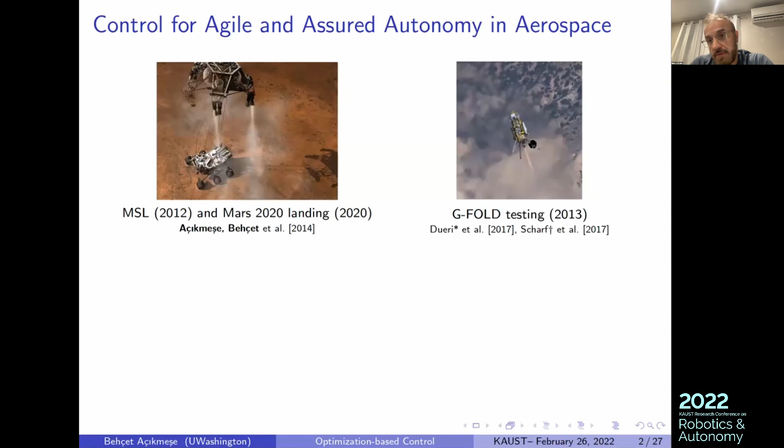And these technologies have been used, not that recent anymore, approximately 5 years ago, by SpaceX, and they are still in use for their reusable rockets, Falcon 9s. And we have been planning other applications of these methodologies for future missions, for space and also aerospace in general.

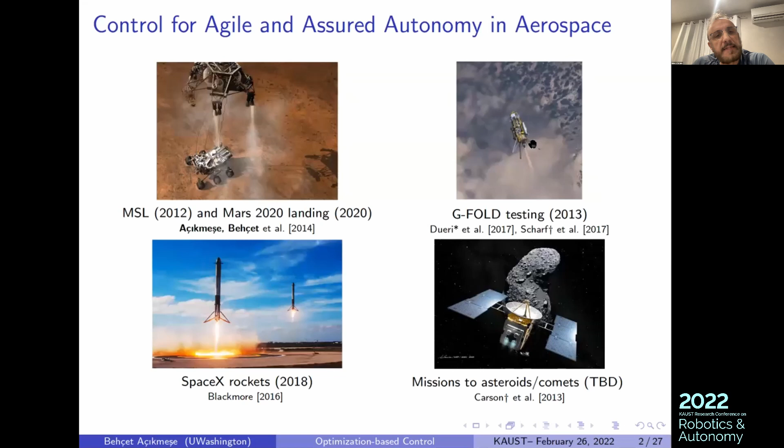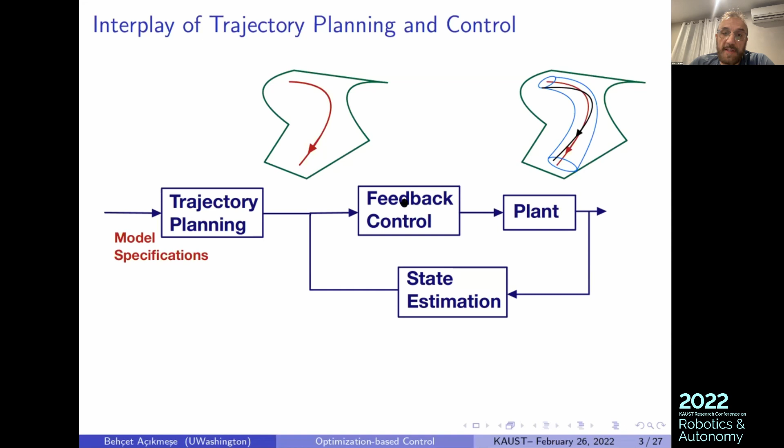Here, first, I want to get my lingo straight, I guess. When I talk about trajectory planning, I mean generating nominal trajectories to be followed by a feedback controller to guide a plant or system, a spacecraft or aircraft in this case. And I'll focus on trajectory planning results in this presentation. We also work quite a bit on feedback control and state estimation, but I'll not talk about it much here.

Our main approach is formulating the problems at hand as convex optimization problems. That's at the core of what we do. And here I want to describe what convexity is and what convex optimization is. In general, optimization is a branch of mathematics where you have a cost function, which is typically non-convex, meaning it may have multiple minima, that you are optimizing over a set of feasible solutions. And the set may be non-convex too, meaning that there may be lines between 2 points in the set that go out of the set.

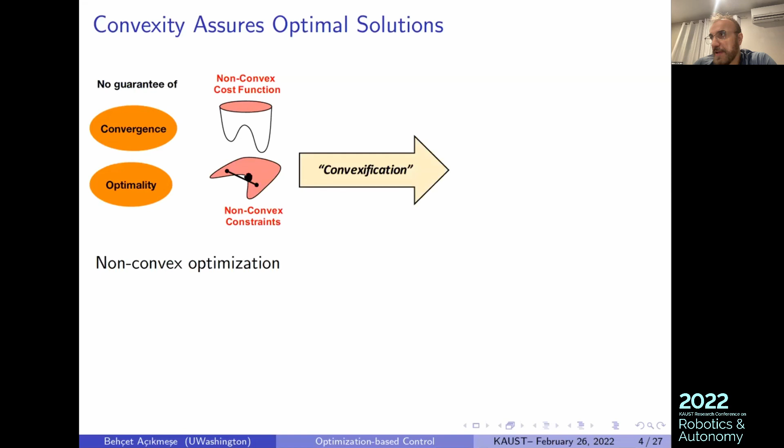Typically, when you have these non-convex optimization problems, it's hard to guarantee solutions in an automated fashion, especially if you want to solve them in real time. The approach we have been adopting is convexification, meaning a conversion of these problems into either equivalent or approximate convex optimization problems. In convex optimization, you have convex costs, which are much nicer. They typically have a unique minimum. And you optimize the problem over a convex set. If you can do that, there are highly reliable algorithms which are fast and also guarantee optimality. So they are potentially implementable in real time on board vehicles during operations.

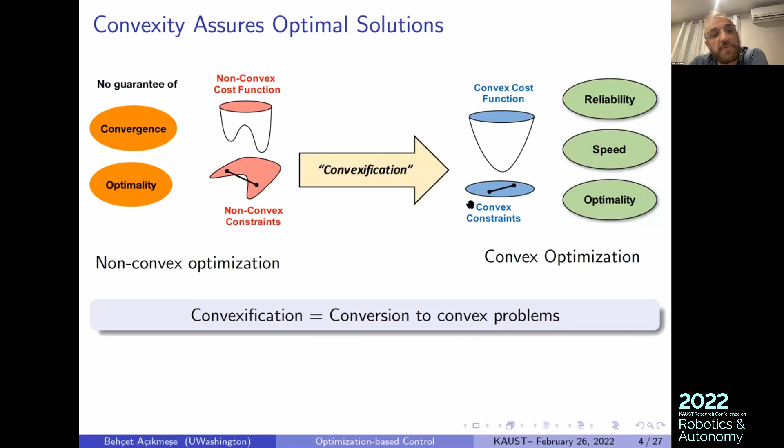The main theoretical contribution has been convexification, meaning the conversion of non-convex problems into convex problems in the realm of trajectory optimization or trajectory planning for autonomous vehicles. What's the trajectory planning problem? It has several components. The first one is the dynamics of the vehicle you have to pay attention to. There are state and control constraints. Some are physical constraints that you cannot violate. Some are mission constraints that are desirable to satisfy. And then there are costs and rewards. These are things you optimize for, and they depend on the mission at hand.

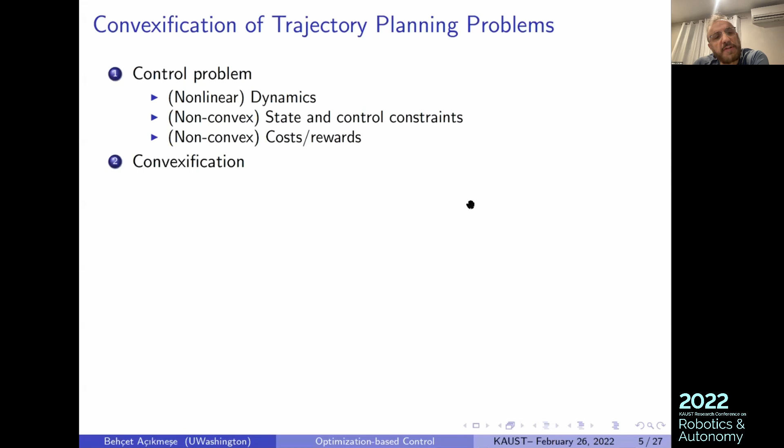For convexification, there are two typical methodologies we use. One is what we call lossless convexification. This is typically achievable when you have non-convexities in your control constraints. And if you have other sources of non-convexity, we use sequential convex programming methods. With lossless convexification, you can convert a non-convex optimal trajectory planning problem with non-convex control constraints into equivalent convex ones. But when that's not the case, sequential convex programming allows you to generate a sequence of convex optimization problems which you can solve to achieve the solution of the original problem. In this case, we cannot call it lossless because we cannot fully convexify the problem. And typically we obtain locally optimal solutions, whereas in the first case, we can obtain globally optimal solutions.

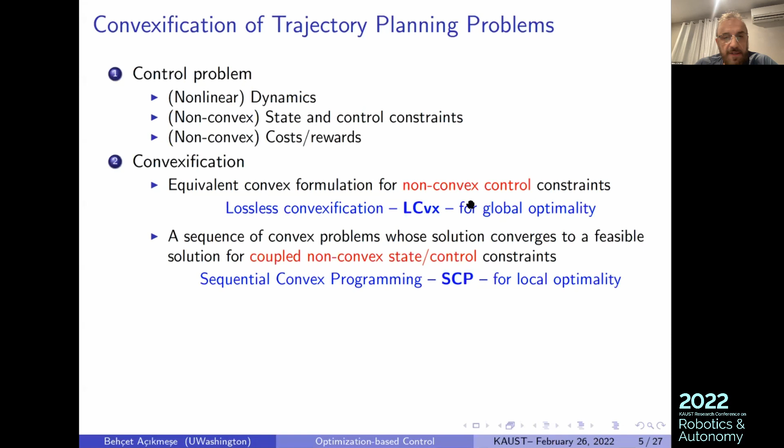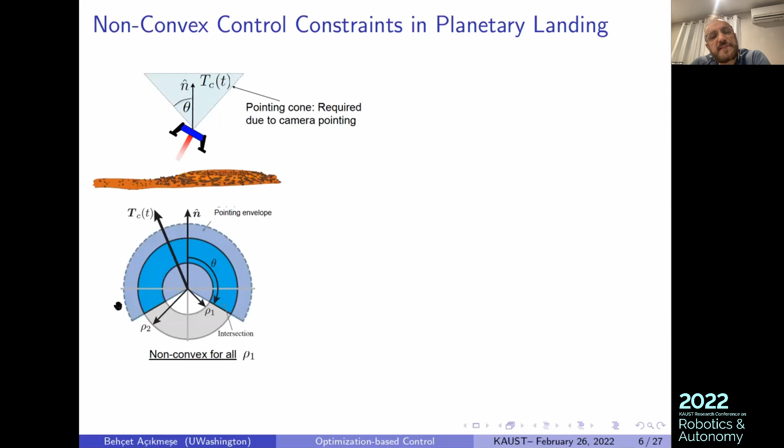On top of it, you may not want to rotate this thrust vector too much relative to the local vertical. This is because maybe there is a camera looking down, and rotating the thrust vector implies rotating the vehicle, and the camera may lose contact with the ground and so on. This generates this blue area, which is non-convex. We have been generating mathematical methods that ensure lossless convexification of it.

And here is another problem of this type, which is quadrotor flight. In a quadrotor, you can model the quadrotor as a lump mass with a thrust attached to it. Thrust is due to the propellers, of course. In this case, also, there is an upper bound and lower bound. The lower bound comes from an interesting fact: due to the propellers, you may lose attitude control if you bring this thrust below a certain level.

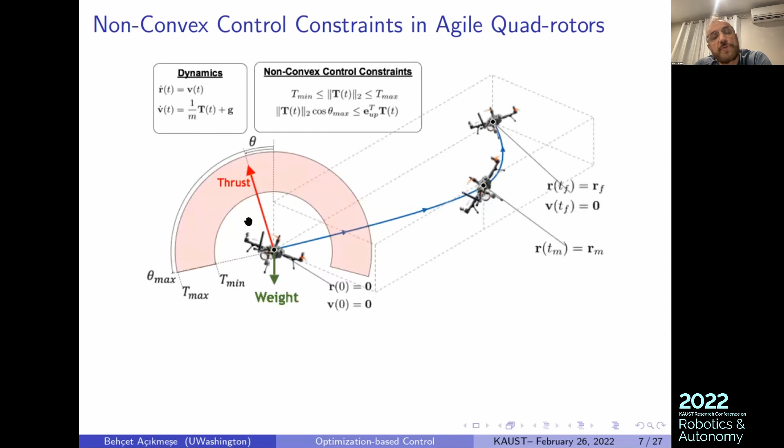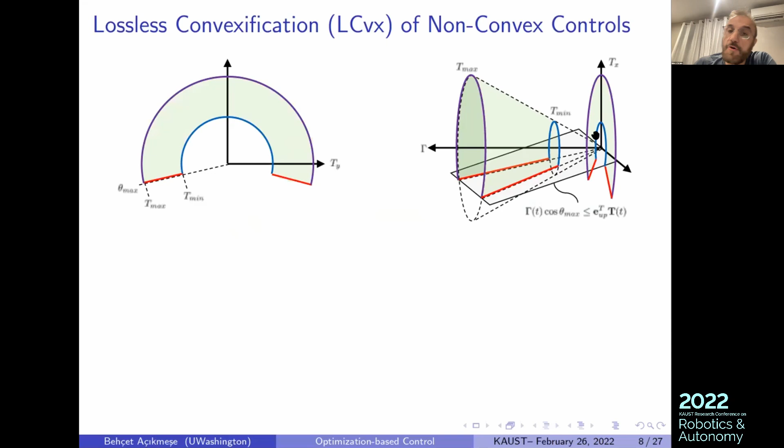And also there may be pointing constraints on the thruster, again, due to maybe a camera looking down or a payload you are carrying and so on. Again, this is a non-convex region for the thrust vector, which is the control input. And we developed these relaxations which take the original non-convex control constraints and relax them into a higher dimension to a convex cone cut by a plane,

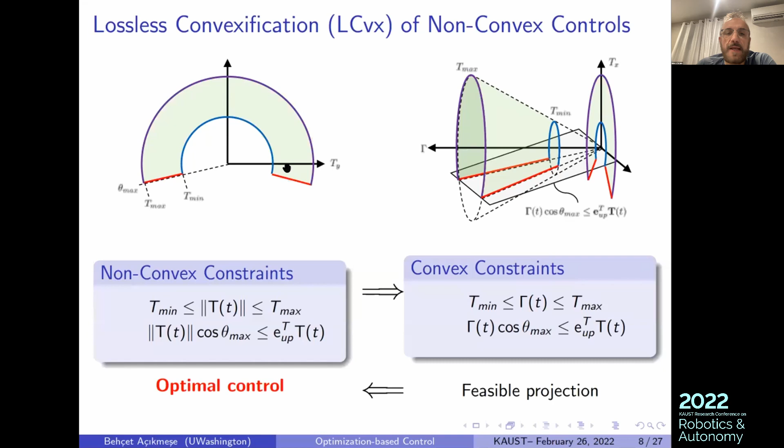and show that if we solve this, what we call lifted or relaxed problem, you can always obtain solutions. This is a convex problem, with global optimal solutions, which can also be projected back into the original space to find the global optimal solutions of the original problem. That's why we call it lossless convexification. But as I said, this is only possible when you have non-convex control constraints.

In the general case, when you have mixed control-state constraints that can be non-convex, or pure state constraints that are non-convex, we use sequential convex programming methods to solve these trajectory planning problems, or more generally, mathematically, optimal control problems.

Here, again, you may have a cost, dynamics of the system represented by this differential equation, state and control constraints, mixed state and control inequality constraints, and some boundary conditions, which may be equality or inequality constraints.

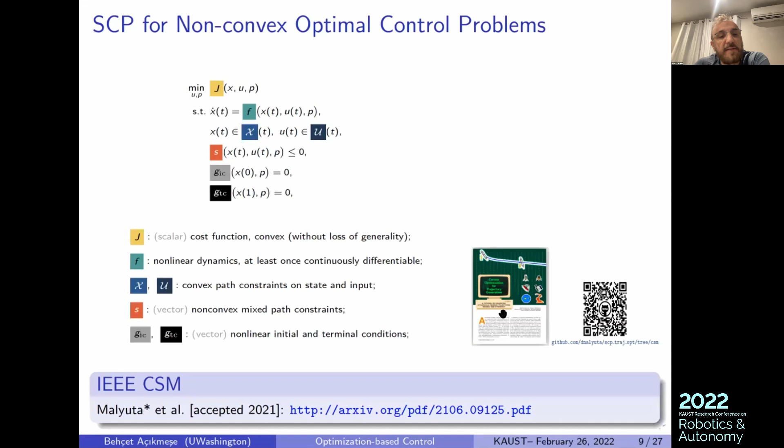The idea in sequential convex programming is the following. There are several sources of non-convexities. One is the nonlinear dynamics of the vehicle. They define nonlinear equality constraints, if you like, which define non-convex feasible regions. And there may be other sources of non-convexity due to other constraints. What we do is generate a sequence of convex optimization problems.

The way we do that is we have an initial guess to the solution, which doesn't have to be an accurate guess, and can actually be quite off from an accurate or feasible solution. You start with it, linearize the dynamics around it, and generate linear time-varying dynamics. You convexify constraints by using this reference solution. By doing that, you generate what we call a convex subproblem.

You solve this convex subproblem with a convex solver, obtain the next trajectory, do the same iteratively at the trajectory level, and keep on going like that. This process is typically convergent, and you reach a local optimal solution, if there exists, of course, a feasible solution to the problem.

And it's always convergent. If it is not a feasible problem, you will also get some hints about why it's not feasible. And we have been using this type of methods with some variations over many problems. The difference of this method with the more classical methods of optimal control is that in the classical, more standard methods, people discretize the problem in a nonlinear, non-convex fashion, and send the problem to a non-convex solver, like IPOPT, which is a well-known non-convex optimizer.

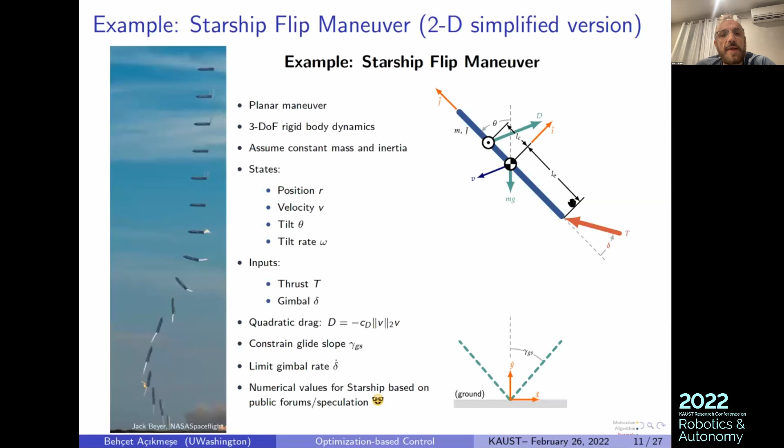And as I said, the Julia package, in the version we put out, uses ECOS, which is a publicly available second-order cone programming solver. We have been putting this out, and people have been using this solver. I encourage you to use it too.

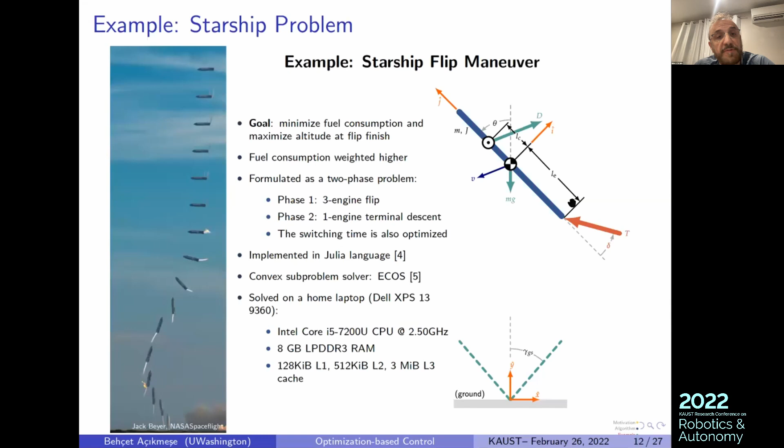It was developed originally by my student Danylo Malyuta, and others contributed to that package too. Some of my students are Purna, Skye. I want to name some here.

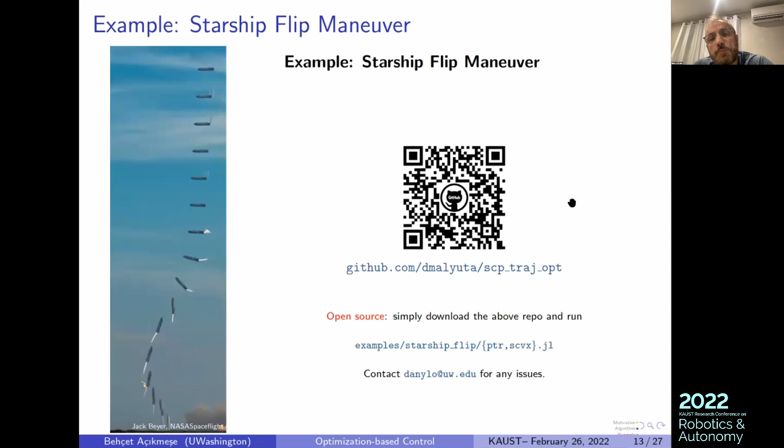And we also gave a sequential convex programming toolbox workshop at a recent aerospace conference in Breckenridge. And there is a tutorials repository. Again, I have links here if you want to use this package. The code runs out of the box, so hopefully you don't have to do too much.

And there are some toy problems. Not really toy, actually, they are quite realistic problems. One is this planetary landing trajectory planning problem you can play with.

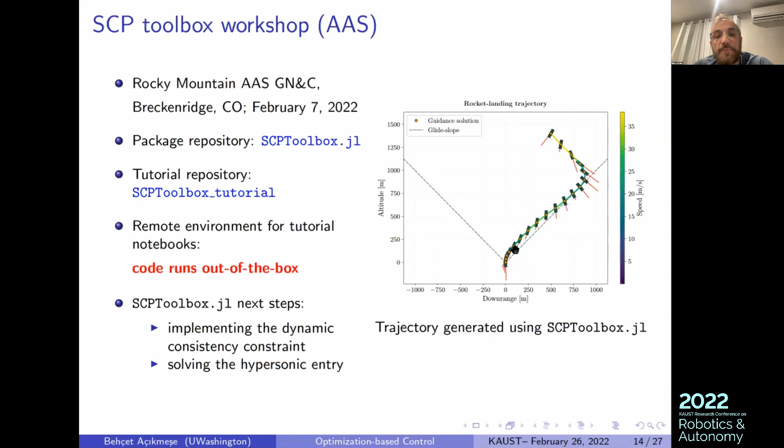And maybe in the last 5 minutes, I want to talk about a key component of solving these problems reliably in real time, which is having a numerical convex optimization algorithm to solve these convex subproblems that we generate in SCPs. For that, we have been developing first-order methods for conic optimization, customized for trajectory planning.

Conic optimization of this type, where you are minimizing a quadratic cost defined with a positive semi-definite matrix P. There are some conic constraints and some convex constraints. We differentiate between those, where K is a convex cone. By the way, this convex cone can just be zero, meaning Hz may be equal to zero, a linear equality constraint, for example. And this convex set D is a set that you can easily project onto. The key point is that it's an easily projectable set in closed form.

And a lot of linear programming, second-order cone programming, and semi-definite programming problems are examples of this type. And we propose a proportional integral projected gradient algorithm, which is a first-order method to solve this problem. It is a very simple algorithm, actually. It has a linear update rule, which is a gradient descent rule, if you like, and a projection operator. That's the only thing you have to do that's complex.

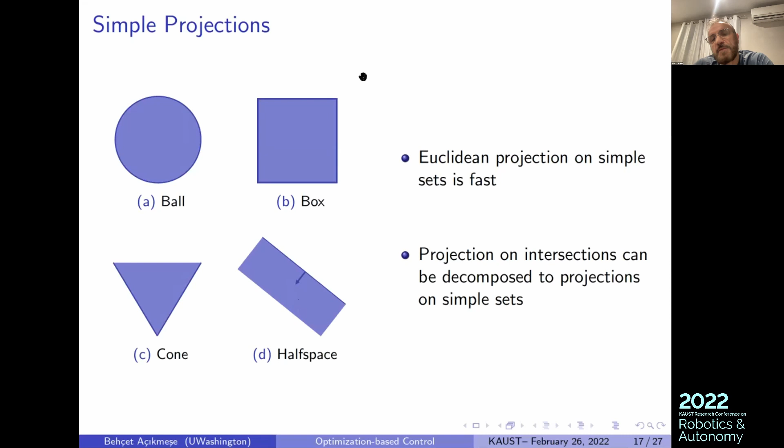And this algorithm doesn't require any matrix computations more than matrix-vector multiplications, no Cholesky decomposition or any other form of decomposition. You can exploit the problem structure very effectively. And as I said, simple algorithm and code, easy for verification. And simple projections can easily be done onto balls, boxes, cones, and half spaces. That's what we take advantage of. Projection is basically Euclidean projection, which is finding the closest point in the set to a given point. That's what I mean by projection.

The difference between this kind of first order algorithms and second order algorithms like IPMs, interior point method algorithms, is that typically these algorithms take more iterations than IPMs, but per iteration, the complexity is much, much, much less. That's how you gain in terms of computation time at the end.

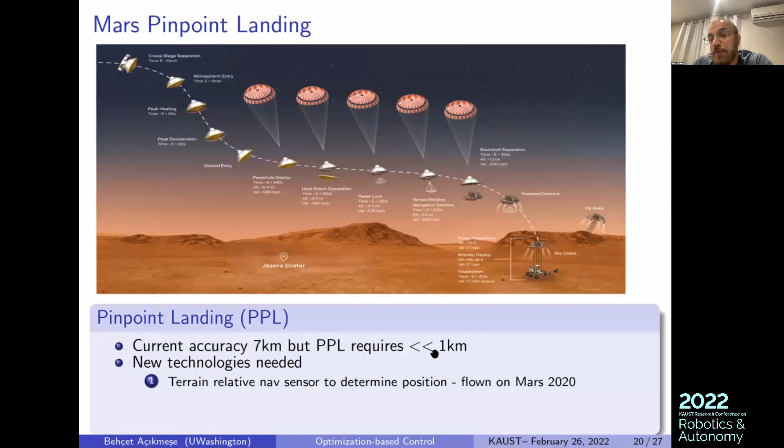And another application of this type of algorithms, that was my core application actually initially, is Mars pinpoint landing, where you want to bring a lander vehicle to within 100 meters of a target. Till now, our requirements were always in kilometers in the last 2 missions to Mars. And we developed the lossless convexification-based algorithms and demonstrated them, as I said, with a test rocket. This algorithm was called G-FOLD.

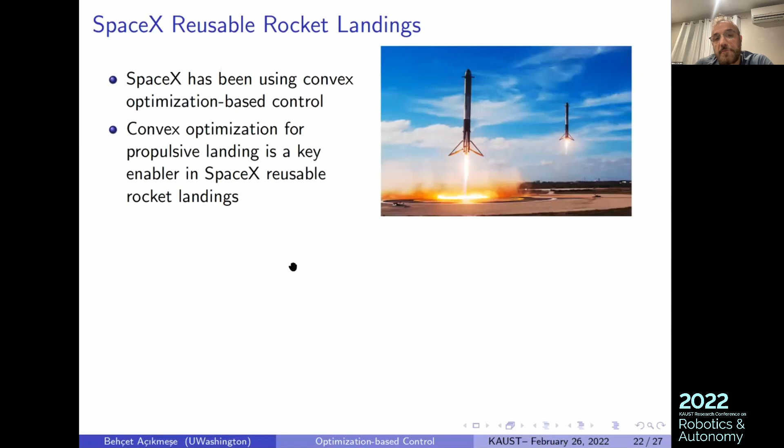Again, SpaceX landings for Falcon 9 are amazing examples of use of convex optimization in flight. And Dr. Lars Blackmore was the key developer of this in SpaceX. He's their chief guidance, navigation, and control engineer, my close collaborator. And I'm currently working also with a team of NASA scientists to develop next generation moon landing, planetary landing algorithms in general. This project is called SPLICE. That's something that I'm working on actively.